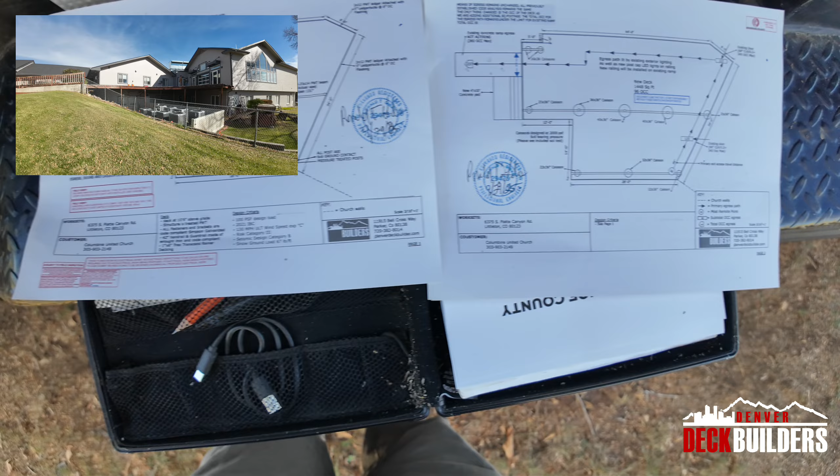Alrighty, so got the plans out. I'll turn you guys around to show you guys those. Okay, so we've got 2 drawings here. One is our framing plan, and the other one is going to be our egress and caisson locations and sizing plan. The reason we had to do 2 of these is because we had to do multiple sizes of caisson.

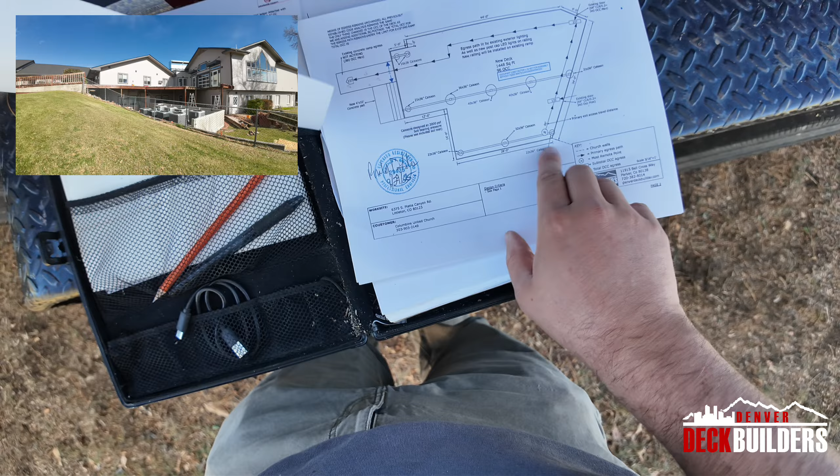So on this one we have 40 by 36, 2 of those. We got some 21 by 36, 32, 22, let's see, 25, and some 16. So we have a lot of different caissons going on here. And the reason behind that is because this is a commercial deck. Commercial deck, we actually had to design this at 100 pounds a square foot because it's an egress path. If it wasn't an egress path, we could design it at 75.

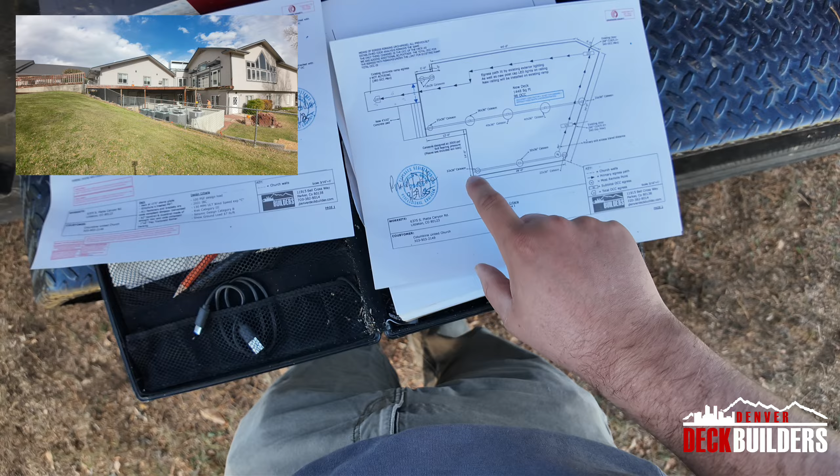So because of that, we actually had to upgrade our beams and upgrade our caisson sizing. If you notice right here, it says they're designed at 2,000 pounds per square foot soil bearing pressure. So that basically means the square footage of these caissons have to be a certain measurement to handle the weight of the deck at 100 pounds per square foot.

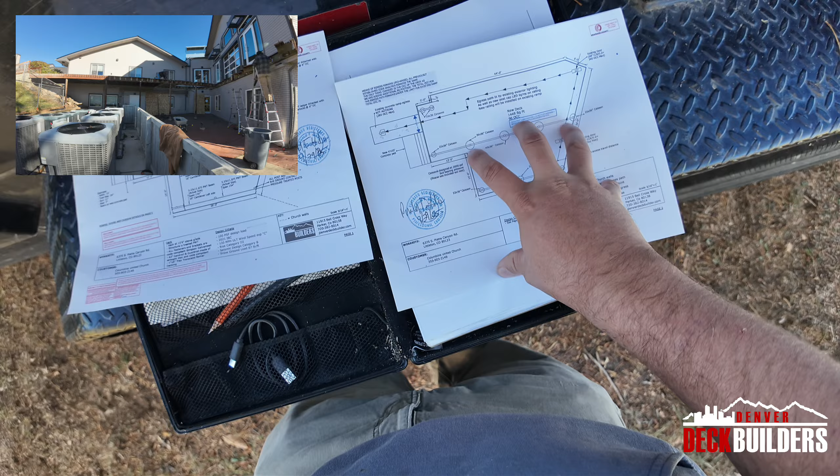So we had that, and then because it's commercial as well, we had to add in our egress paths. Most of those came from the original plans for the original deck, and then we added in our new calculation, which was 96, instead of, I believe the original had like 52 or something like that. So we added that in, made sure our egress location would handle that amount of occupancy, and yeah, went from there.

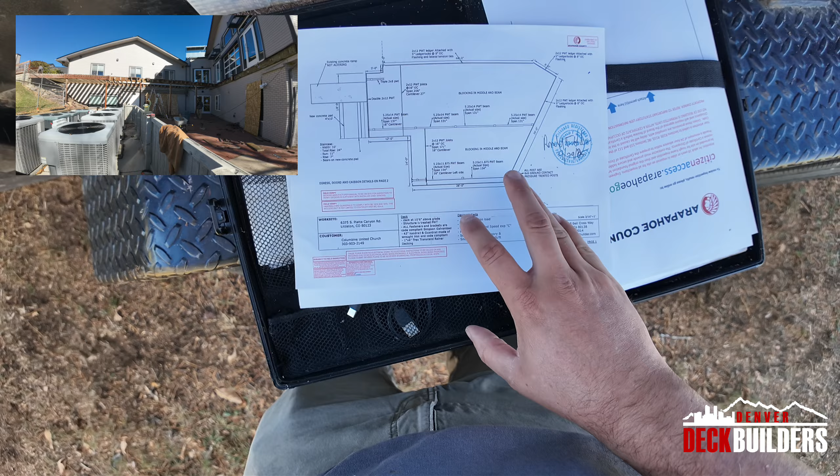And then this plan right here, this is our framing plan. So this has all the details for the frame. We had quite a bit of different sizing of beams. Right here it says 5.25 by 14. So these are going to be actual size, 1.75 by 14 inch beams. We actually upgraded those to 18 just because we need to move this caisson a little bit if we have to for some AC units that are going right there.

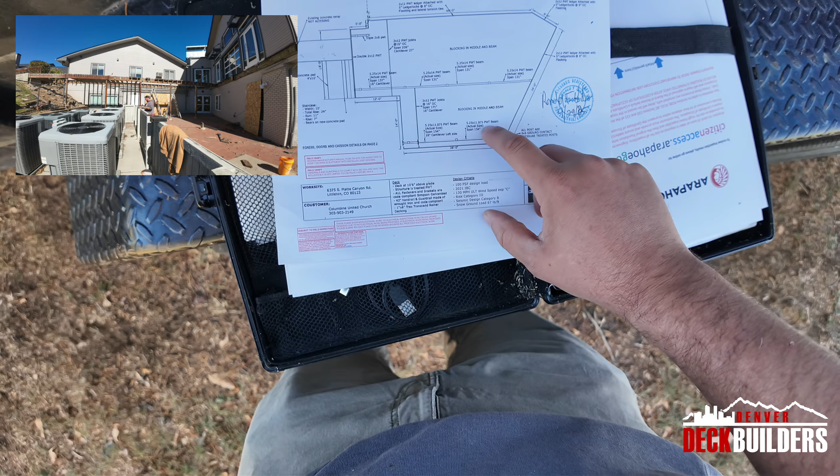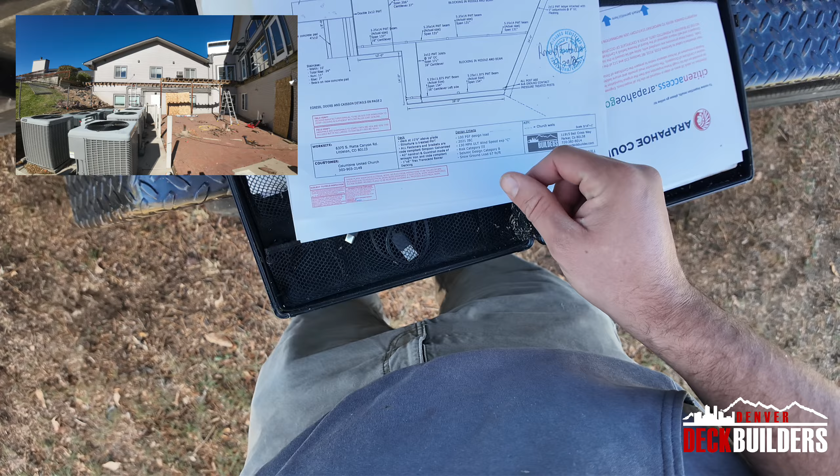So we have a few different sizes of beams. One we have is 11.875. That's going to be an exact measurement as well. And then our 14-inch beams, which are actually going to be 18s. And then all of our framing everywhere else is going to be 2x12 PWT joists. So LVL, pressure-treated LVLs everywhere with tape on the top. And then we'll come in with planking on top of that. So yeah, this is our plan for that.

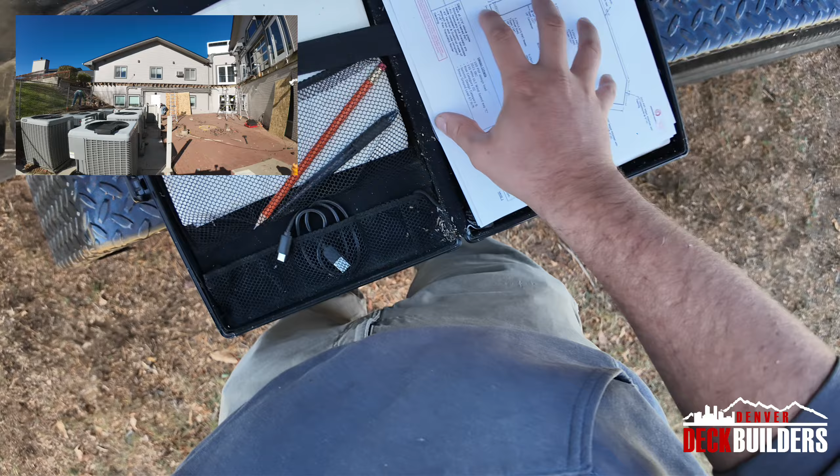I do have a planking layout plan and a railing layout plan that I haven't printed out. So I'll show you guys those once we get to that stage of the project. This is just what we need for permitting. So yeah. Alrighty. So now that we're done with that, I'm going to close this up so it doesn't get wet. Now let's go take a look at the existing deck structure.

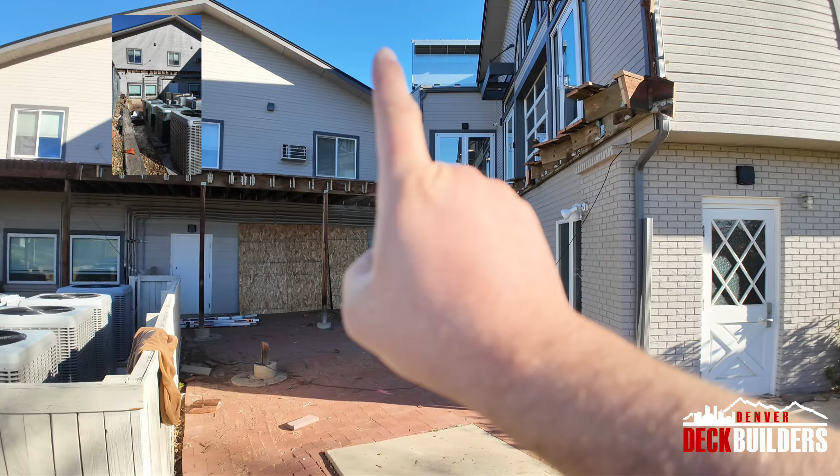Sorry in advance if there's a lot of background noise. My guys are finishing demo today, so they're taking down some joists. Okay. So this is the structure here. It came all the way out to that corner right there. It came out this way, and it went back, and was angled to right about there. So very nice large deck.

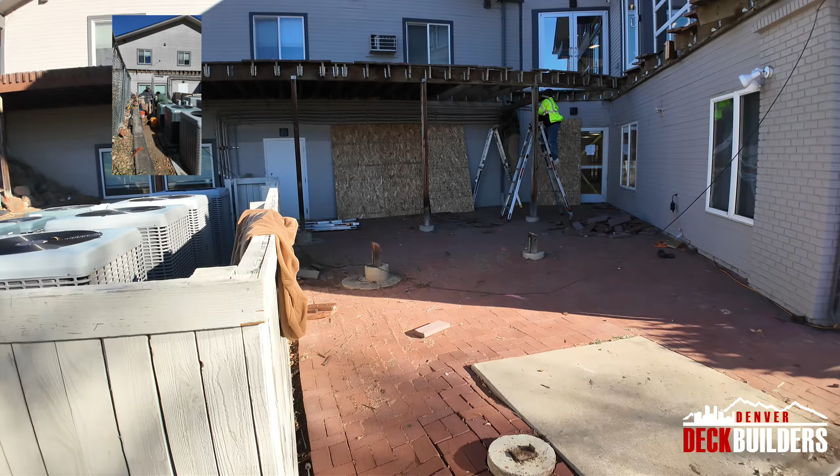The original framing was 2x12 and 2x10. They had one more beam than we are going to have. So we're going to be adding that in. We'll come in and we'll break out these guys here, around there. Break those out, and then we'll pour new caissons tomorrow or Thursday.

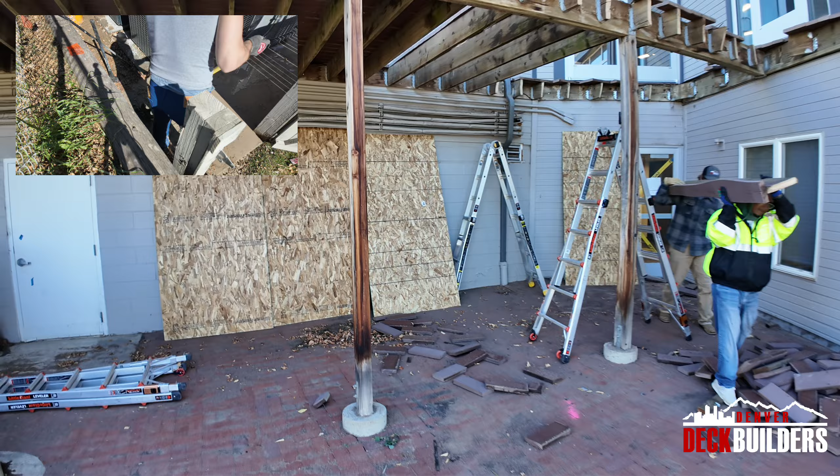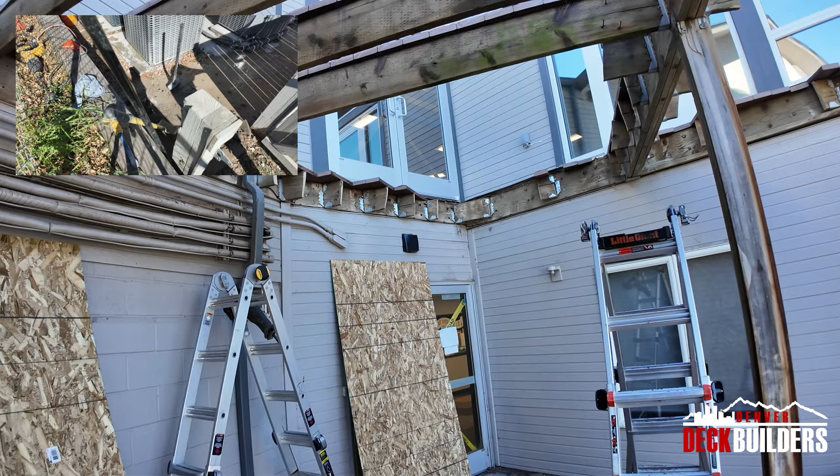As you can see, the framing is really old. We have a lot of rot going on, a lot of algae. So we're ready to take that out. This planking was the old, it's like 2-inch thick Trex, extremely heavy stuff.

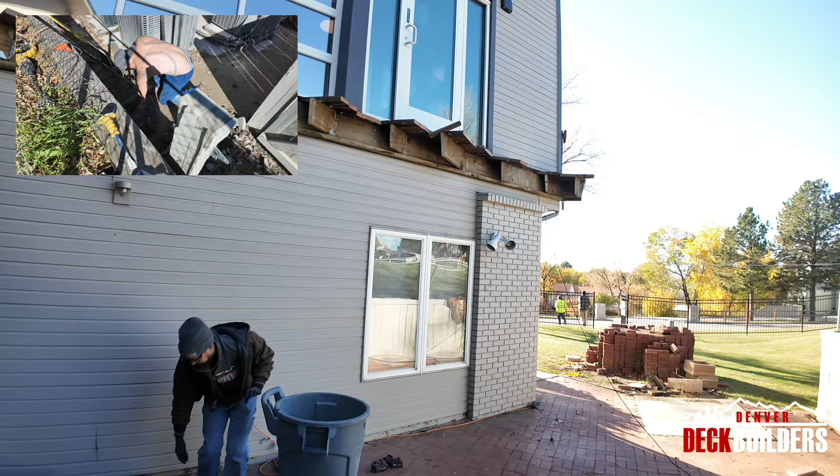So yeah, nothing much to it, but we're gonna finish taking this out, have all that on a time lapse, and then I'll come back and talk to you guys in a few days, or today, or tomorrow.

Yeah. What? Why are you laughing at me? But for today, yeah.

All right, now that I'm done showing you guys the framing of the existing deck, we'll come back a little bit later and show you everything else as we move along in the project. Today's goals are to get all the existing framing out and down into the dump. And then we're gonna come in and prep for tomorrow.

We'll have a skid steer here tomorrow, so we'll be doing our caisson holes with that. And then hopefully be pouring some concrete tomorrow afternoon, if we get everything done as fast as I would like to. So yeah, we'll come back and talk to you guys later.

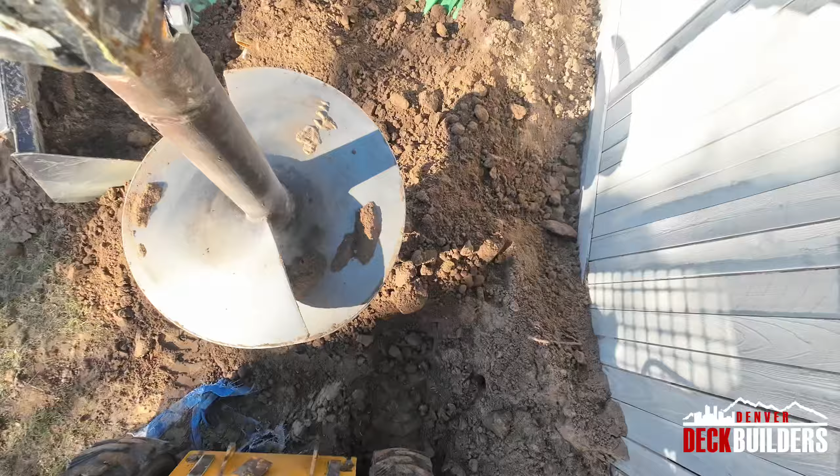So we have been working the last day and probably get some footage on a time lapse with the skid steer. We had a little bit of issues with that. Had to go get a new one yesterday. Unfortunately, they had to bring one out. So lucky for us, we have it for a little bit extra today, and then we'll have it all day today. Added about 4 hours onto that. So yeah, it's been really helpful.

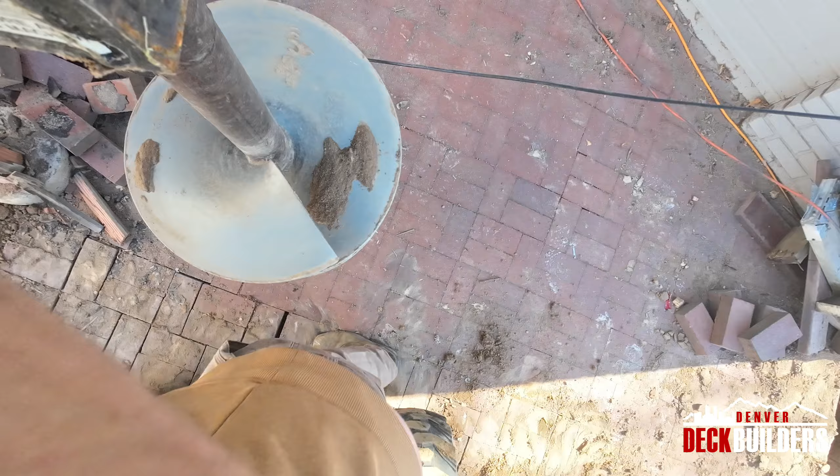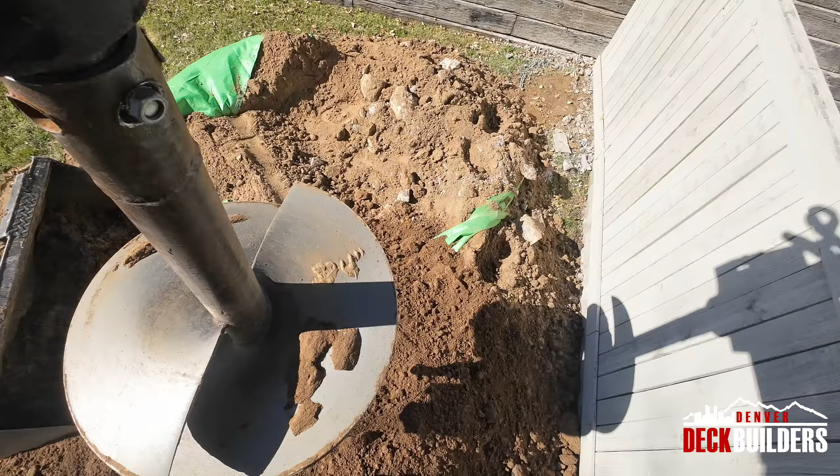Not as helpful digging the holes as I would have hoped, because we ran into some pipes, and I can go down there and show you those. So it wasn't as helpful with that, but really the helpful part has been moving the dirt. So getting the dirt from down below up here into the trailer and out of the way. So it has saved us a lot of labor on that.

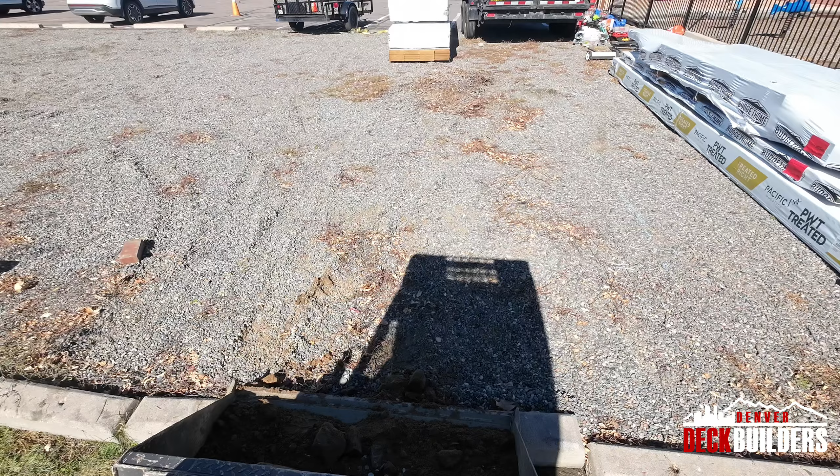We're actually going to go ahead and drive down there real quick, and I'll show you guys what's going on down there. So I will be right back, and we'll show you guys the property, what's been going on the last day or so, and give you guys kind of the rundown of what we're going to be doing today. So see you guys down there.

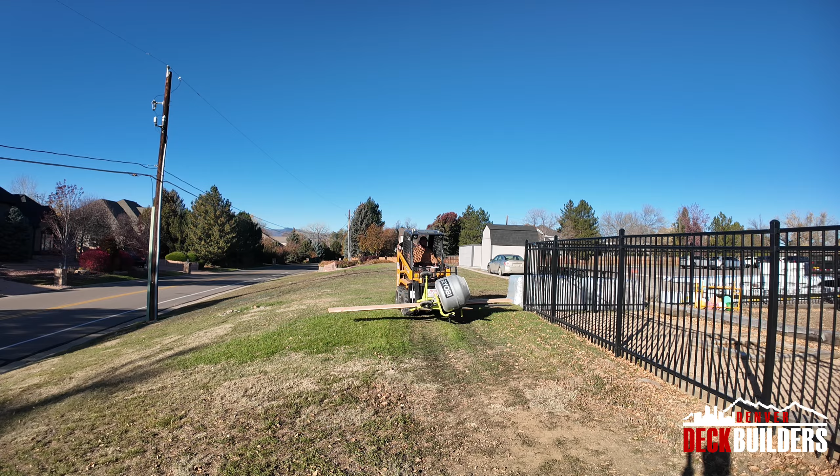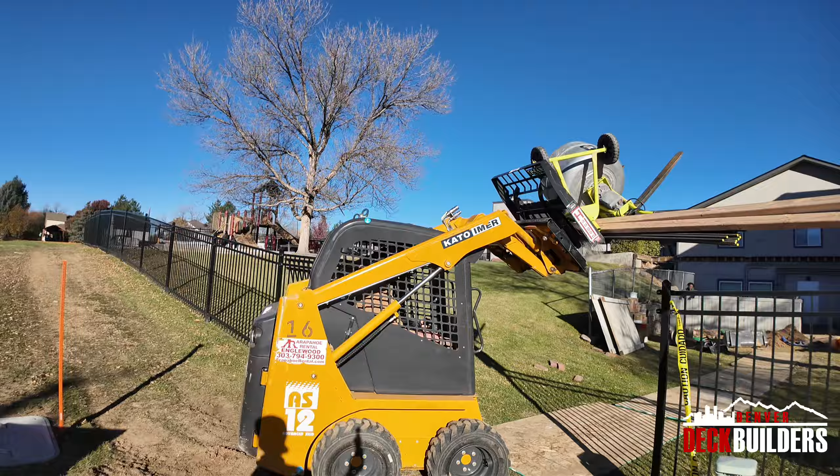Okay, welcome back. Got a little footage of us driving down, but yeah, got this down here. We're gonna go ahead and we got some rebar to throw in the holes, got a few forms to form up, and then we use the concrete mixer to mix the concrete. Got a lot of that to mix, so that'll be a fun day. But I'll show you guys kind of what's going on with these guys.

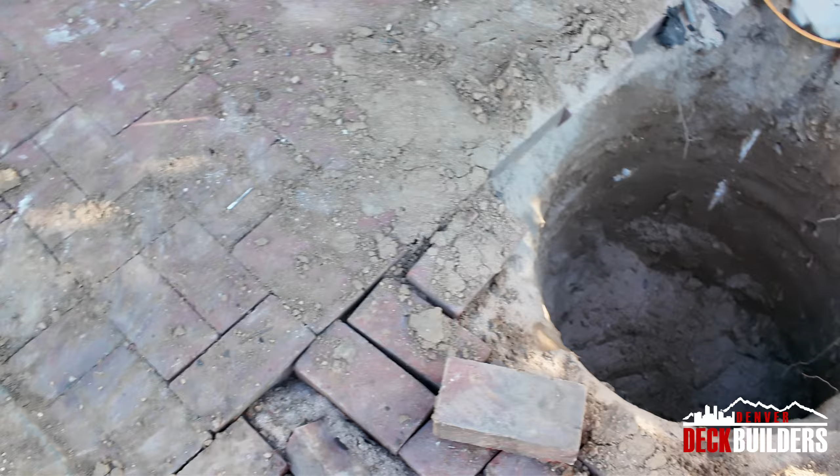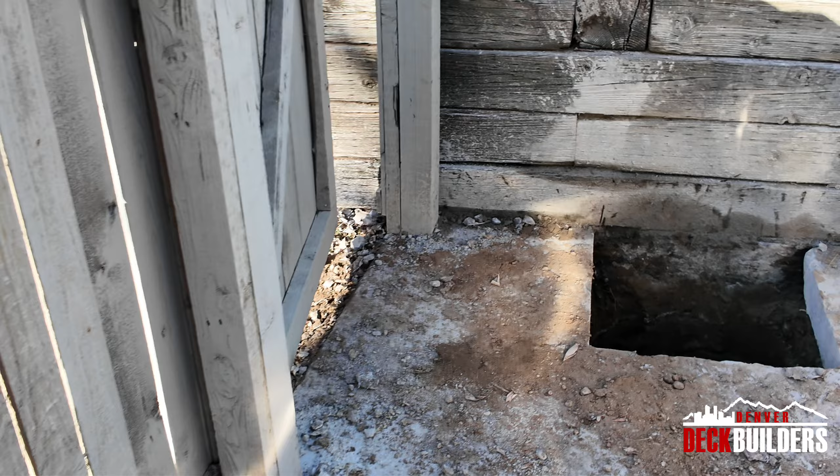We were able to use the auger on some of the holes. This one is all dug, and that one was done with the auger 100%. But we did find some pipes in some of them, so we're gonna reroute those. And then got these guys. We had to hand dig this one, but that one's all good to go. And then we have this one over here. This is the largest one that we had to hand dig fully, but got that dug yesterday as well.

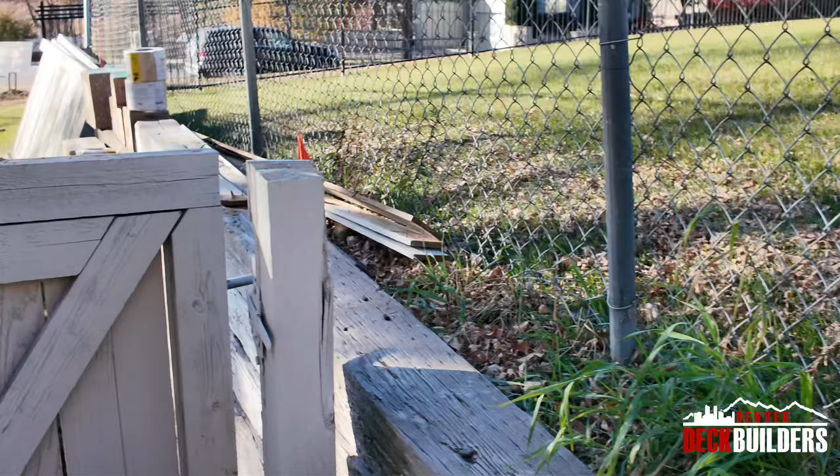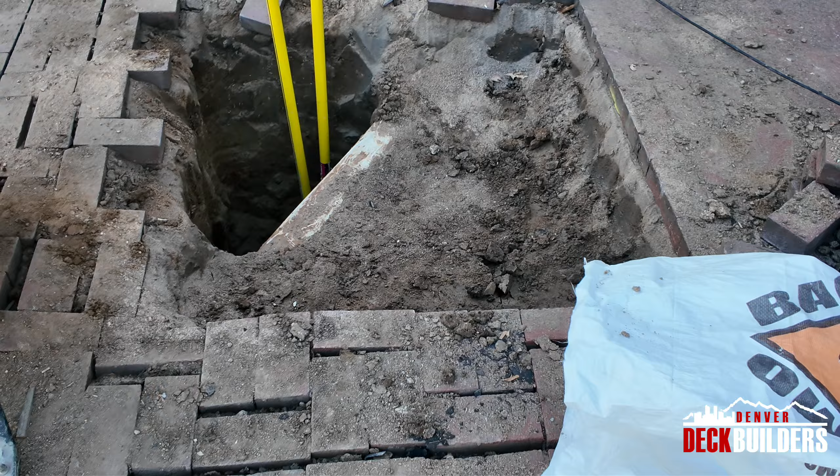We got, let's see, one caisson up there where that orange stake is. We got two over there in that corner where we have to dig those ones. And then we got the large one here in the center. We are gonna auger half of that out because we can't protect that pipe while we do it. Half of it's already dug there. And then we got this one over here that we gotta auger. But that's kind of the plan for today.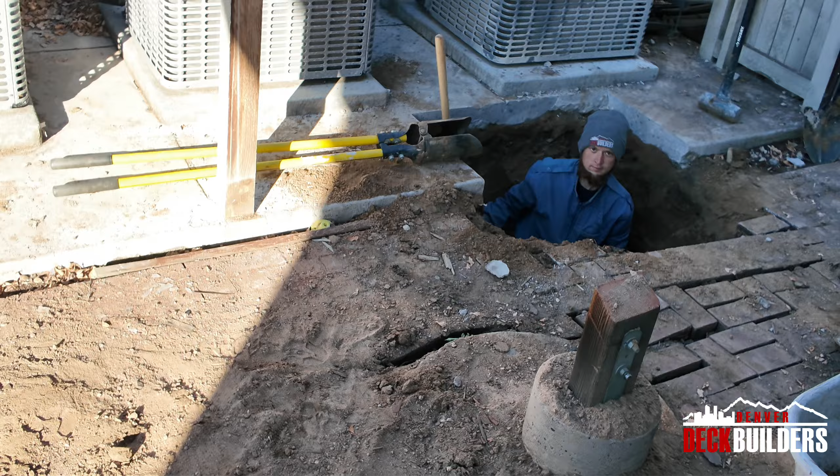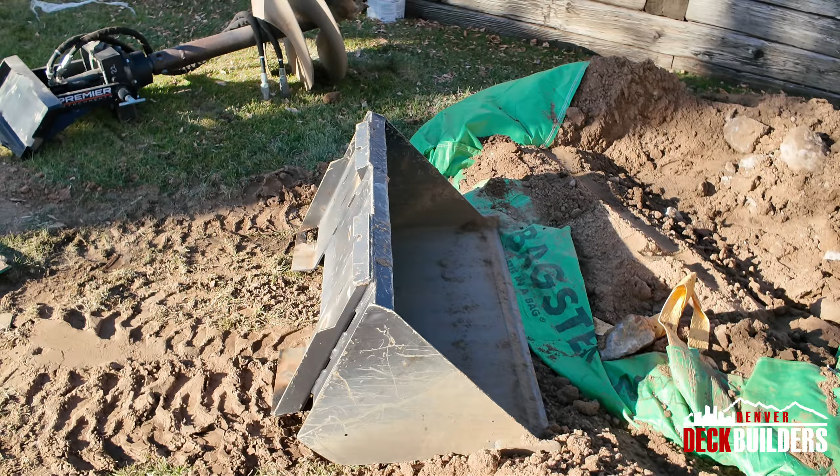We're gonna get rebar thrown in there. Got Nate over there down in the hole. We're gonna get that done. And then while we have the skid steer here, we're gonna get 90% of the dirt moved out of here so we don't have to deal with that anymore. But yeah, fun day ahead. We'll get some time lapses going here and there and go from there.